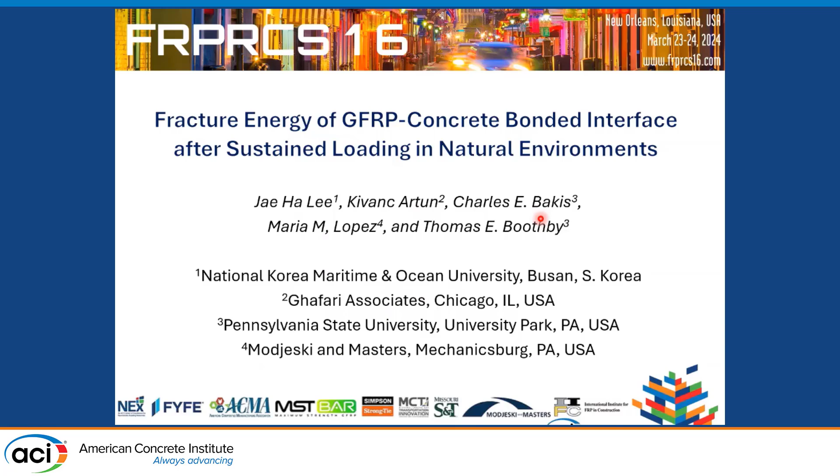So the topic is on some long-term conditioning of beam specimens. And I'm not going to give a detailed literature review on this. I'm sure a lot of you have seen this. If you're in this session, you're interested in this subject. But there's a lot of effects of different things on bond between externally bonded FRP reinforcement and concrete. Among them, you have freeze-thaw going on due to weathering outside. You have water outside. You have ultraviolet exposure outside. Temperature variations, and we've heard a lot about these things over the years.

But a long time ago, when we first designed this project, what we were thinking about at that time was, what about a natural outdoor environmental exposure? And what about in combination with sustained loading? At that time, anyway, there was practically no work done on applying a sustained load and then throwing on top of that the natural variations in climate conditions that go on outside.

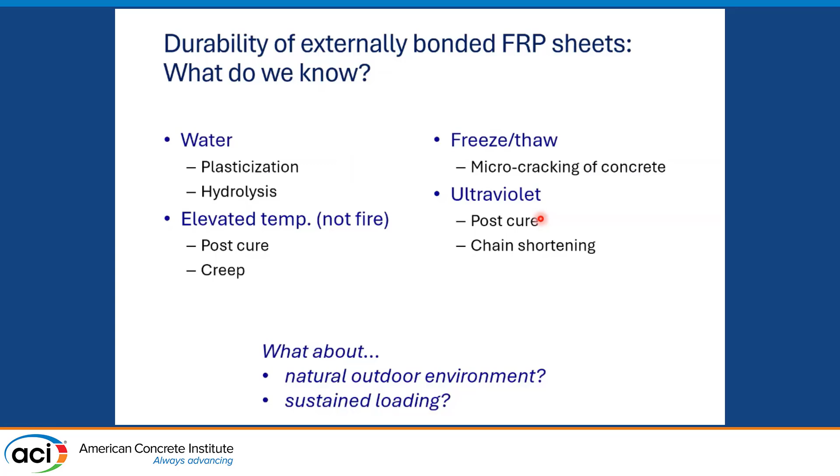So that's what we decided to do, and the objective here today is to talk about the results of some long-term testing where we have kept beams under load for a total of 13 years and finally took them off. And we have some intermediate data at 6 years. Of course, we got zero time data and did some bond tests following a sustained loading period. And that picture there shows just a picture of these beams.

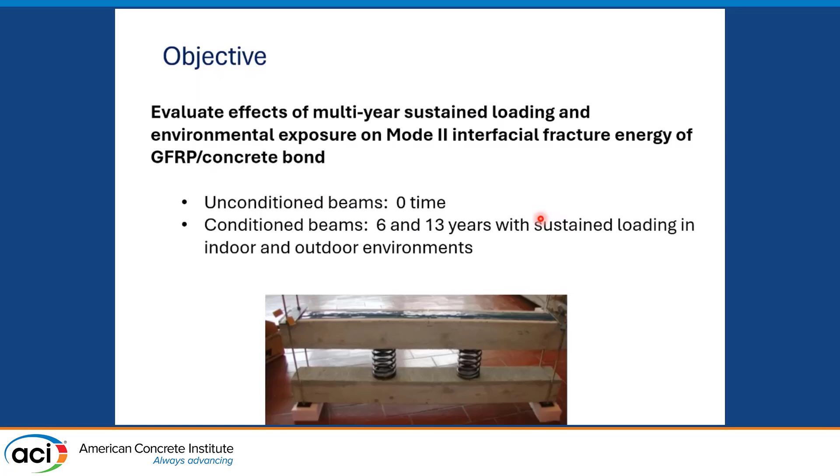I'll talk in more detail about how we designed this experimental program and then go over the results from the fracture behavior, basically getting the Mode II interfacial fracture energy from that kind of a specimen, a beam bending kind of a specimen. So first a little bit about selection of a specimen.

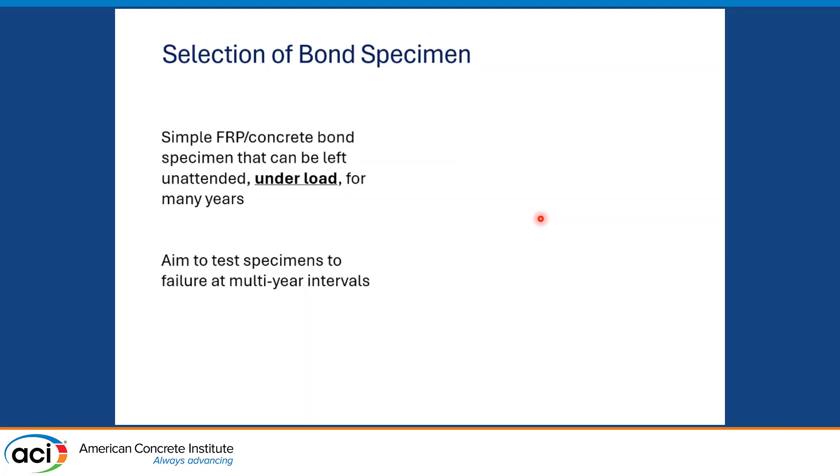And so what we ended up doing was going with, like the photograph on the previous page, a double beam setup, restrained at the ends, springs in the middle that provide a 4-point loading situation maintained over a bunch of years.

And the springs in this case were compressed considerably, about an inch or so, for those of you who think that way in inches. And so the variation in the load due to creep or something like that is fairly small because if you get a little bit of deflection out of 1 inch, that's actually a pretty small percentage. We looked at that as to how much the spring compression height changes. It's actually pretty small, within a few percent, I would say. And we were actually adjusting it within the first year to maintain a constant spring compression, but found out it really wasn't necessary after that.

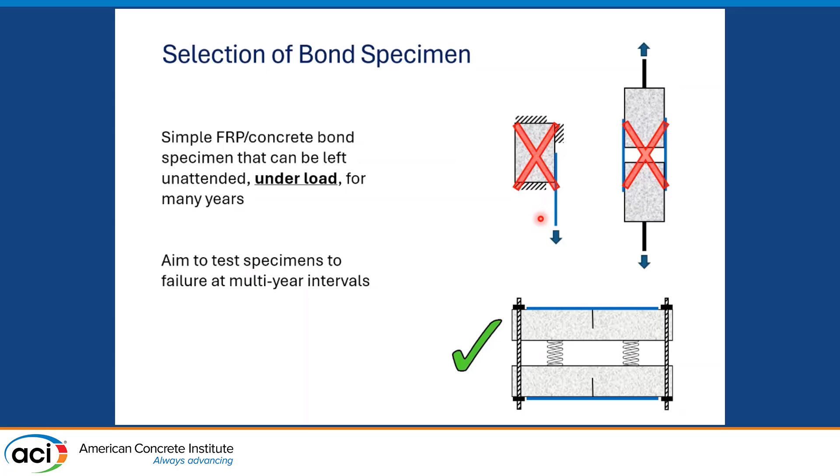This is a lot of stuff to look at, but first just some basic background. This is on GFRP. We did CFRP also. For this paper, I didn't include that, so we're just talking about GFRP because for one reason or another, we had a lot more data in the case of GFRP versus CFRP. The little information on the concrete there, we had two different mixes that provided roughly 21 and 41 MPa strengths. We had coarse and fine aggregates in the concrete. We did not put in any air entrainment admixture. I get that question often, and so that's something to keep in mind.

The epoxy itself is a 3-part system where you have a primer and then you have a putty to level out the roughness and saturant.

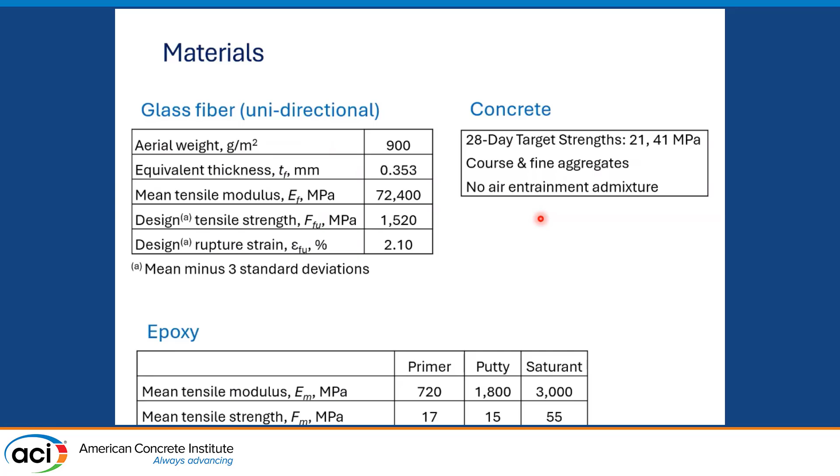Properties are there. You could look at them in the paper if you'd like. I'm not going to spend time on that. A little more detail on the design of the specimens. They're about 1 meter long, as you can see there, and 100 by 100 millimeter in cross-section. They are designed to fail by debonding.

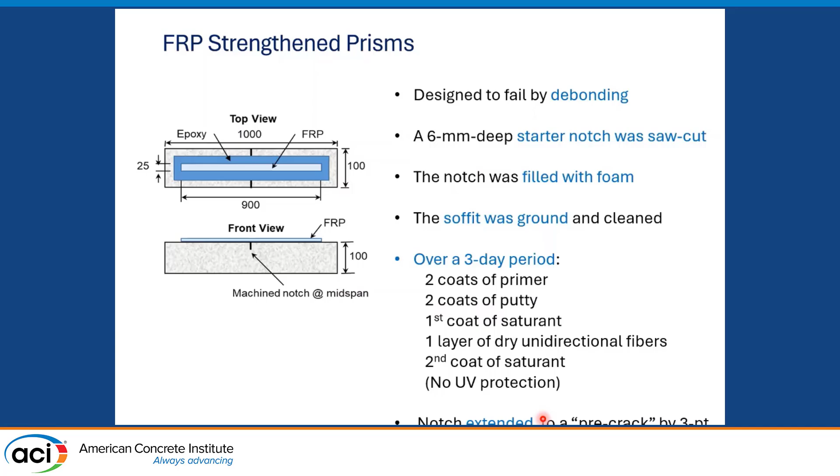We initially use a saw to cut a starter notch, as we call it, and then we fill that notch with foam. And after that, we grind off the top, clean it up, and then go ahead and apply the FRP system on top of that. After the FRP has cured, we put that beam into a load frame in 3-point loading, and we load it up until the concrete cracks and develops a crack which goes a good part of the way through the cross-section. Remember, there's no steel in this beam, so when you crack them, that crack goes probably 80–90% of the way through the cross-section, so they're pretty fragile in handling them after the pre-crack stage.

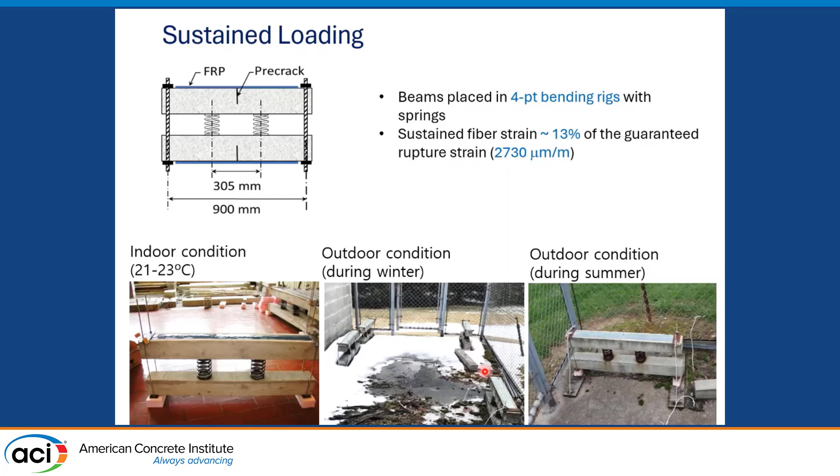So once they've been pre-cracked, then they're ready to go into the sustained loading rigs, as you can see here with the springs. We already talked about that. The sustained loading value was selected to provide about 13% of the guaranteed rupture strain in the FRP, which turns out to be about 2,700 microstrain. And so again, the idea is to maintain that over the course of years by use of those springs. And a couple of pictures on the bottom there showing the inside the lab, outside in the wintertime, and outside in the summertime. So what about that natural conditioning?

We're located in Pennsylvania. Those of you not familiar with Pennsylvania State University, we're in the middle of Pennsylvania, there where that red star is. It's called a warm, humid continental climate, although at this time of the year you wouldn't know it was warm. The temperature, as you can see, fluctuates between maybe +30 and -20 over the years. And if you count the freeze-thaw cycles, according to the climate agencies, they say 65. Not sure exactly how that's calculated. It might not be within the FRP itself, or within the concrete, but that's what the climate people say: 65 per year, which is 840 over 13 years.

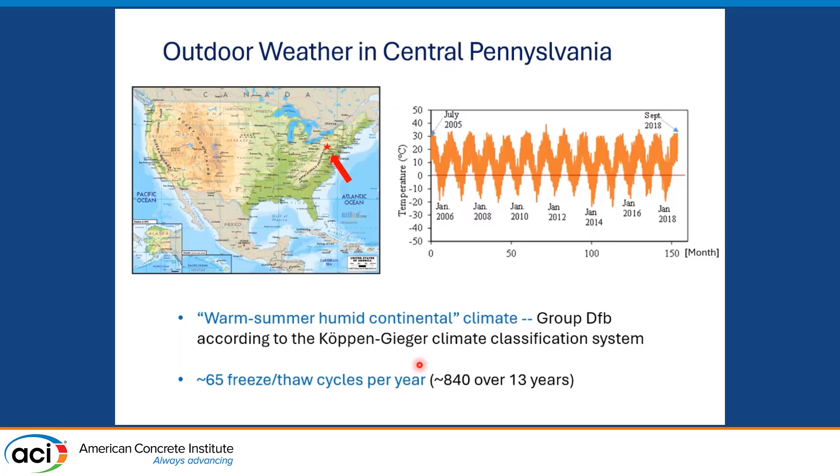All right, so after the conditioning, we get rid of the springs, we take the specimens back into the lab, and we do a 3-point loading test. So the idea is to debond the FRP from that starter crack, and then it grows outward in 2 directions from that. We do strain monitoring so that we could characterize strain distribution, and from that get the fracture behavior of the material. We used 2 methods early on. When we did the 0 time back in close to the year 2000, we did not have the availability of digital image correlation then, so we were using photoelastic strips.

I don't even know if anybody uses photoelasticity anymore, but it's an optical technique where you put a piece of reflective plastic on top of the FRP. You look at it with polarized light, and then you translate the colors into strains. It's a lot easier now with digital image correlation. As you can see here, all that stuff is done pretty much automatically by the computer. So that was done at year 6, digital image correlation, and also at year 13. We also put 3 strain gauges in the vicinity of the notch, right at the notch, and plus and minus 1 inch away from the notch.

After the test, as I said, the specimens were designed to debond, and we were able to rip off the FRP from the remaining part of the concrete and then core out some small cylinders and then do compression tests on those cylinders to measure the strength of the concrete, so that we could account for how much the strength increases over time.

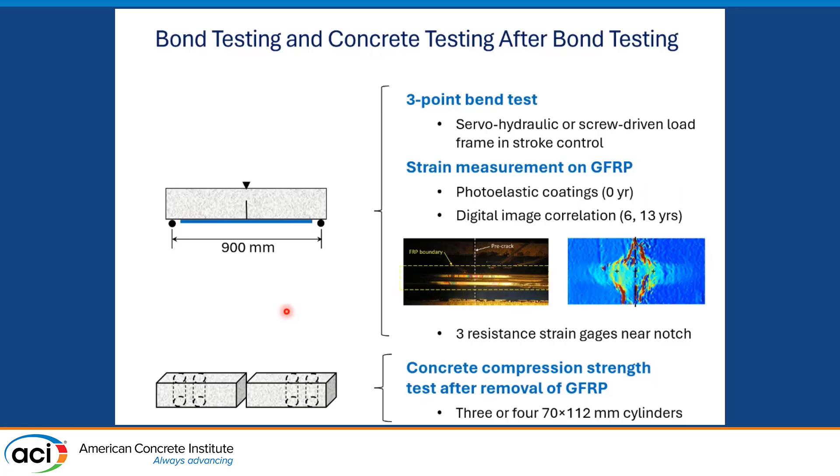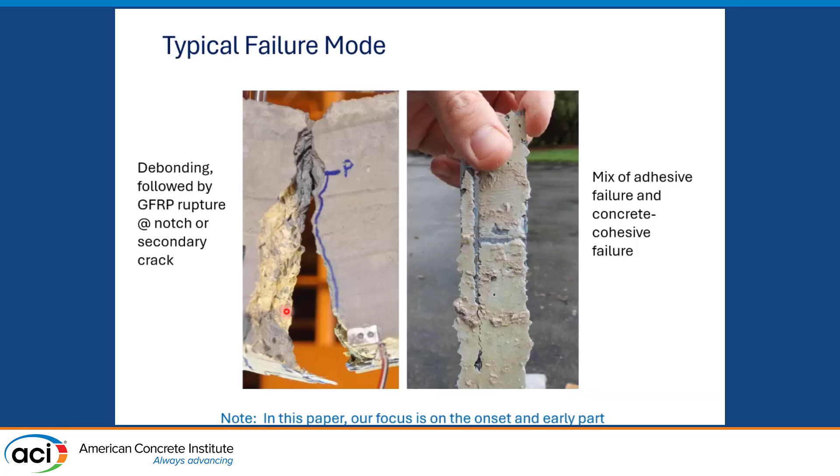Failure mode looks something like this. You typically get debonding for some distance, and there's secondary cracking going on, sort of like tooth cracking near that pre-notch. And then for one reason or another, very often the FRP would fracture at some point after delamination had grown a bit from the starter crack. In this paper, we're not going to be talking, I've presented this stuff elsewhere about the fracture strains, but we're going to focus here just on that initial part of the debond growth.

So the procedure goes something like this for analyzing the strains. We acquire the strain data by whatever technique we're using, photoelasticity. This example is for digital image correlation. These little orange dots are the strain gauge data near the notch. And as you'd expect, they match up pretty well.

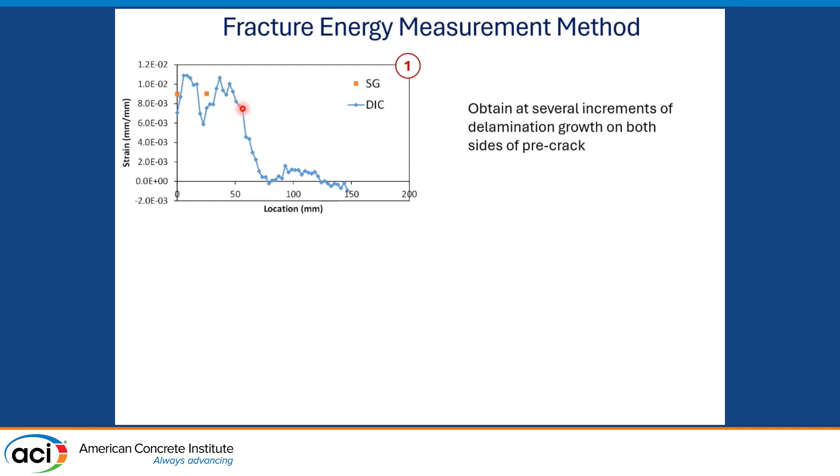And we let the crack grow. Usually it jumps in increments, and at each of those stages we record more data and are able to characterize the fracture energy as the crack grows away from the crack.

Next step is basically a backtrack, if you will, because we found a lot of trouble trying to fit our strain versus position law, which, by the way, we're using this paper down here in the bottom for the strain distribution and local bond distribution and those kind of things. We couldn't very easily use the top left figure because there's a lot of variation in the very local strains. So we basically integrated it to get slip versus position and then fit that form of the theoretical equation from that paper. Third step is to go back to strains again, and now you can see it fits fairly well, and so you don't have to deal so tediously with all of that noise in the data.

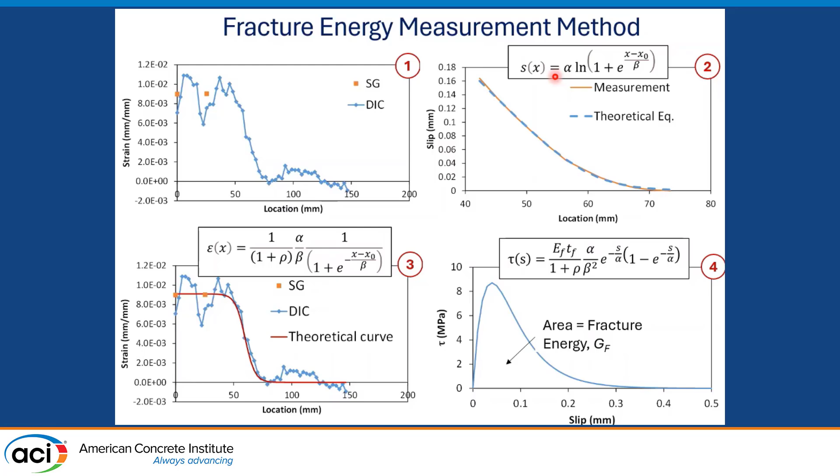And then finally, again, using the equations developed in that paper by Zhu et al., we can find the local bond stress versus slip behavior. All right, so getting into the results, the concrete cylinder testing, strength went up over time as you'd expect. This is outdoor for the stronger strength concrete.

You can see that at 6 years, it went up, and then at 13 years, it went up a total of 33% over those 13 years. The indoor didn't go up quite as much, 22%. The red lines down here are for the lower strength concrete, and that went up even more outside, 46%, and then indoors it went up by 8%.

We use this information to account for the increase in the strength of the concrete by using this equation by Lu and that gang over in Hong Kong, which has the strength of the concrete involved. We do a transformation of the cylinder strength over to the tensile strength, which goes into this equation, plug in our geometry of the FRP and the beam, and that actually can make a prediction of the fracture energy. Now, it won't agree exactly, as you'll see on the next page.

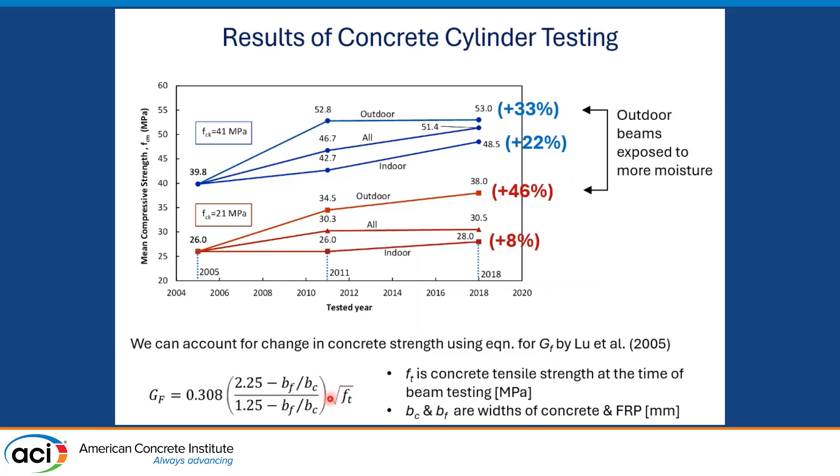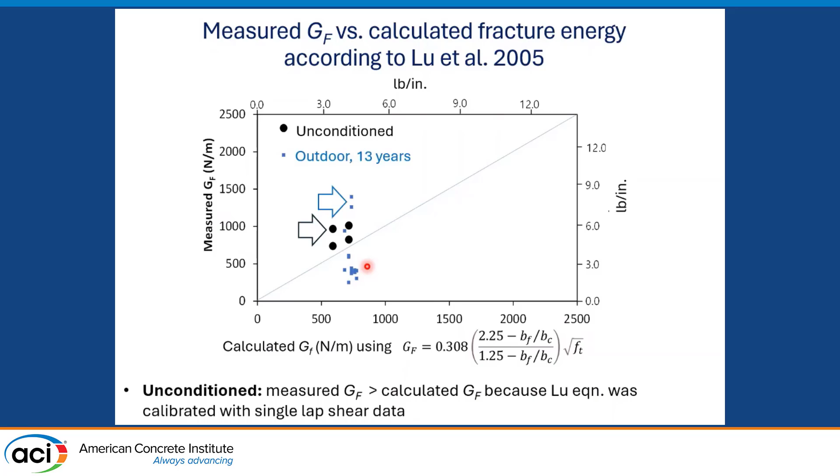The other thing about the 13 years is you see a lot of variation there and you see a lot of points. We actually didn't have that many beams. But what we did, as I said before, is we characterized the GF, the fracture energy, as the crack grew away from the pre-notch. So there's actually a lot of different measurements from some single specimens that are embedded in there. So a lot of things cause up and down depending where you're measuring GF as the crack grows away from the starter notch.

This is just 4 more sets of data. I know this is a lot to look at, but it's basically the same thing I just showed you, but for all these different conditions of indoor and outdoor, 6 years and 13 years. And it's basically the same conclusion, which is that the data after years of conditioning is up and down depending where we measure the fracture energy, and of course depending on the environment as well. We're interested in the environment. Okay, that's what we want to do.

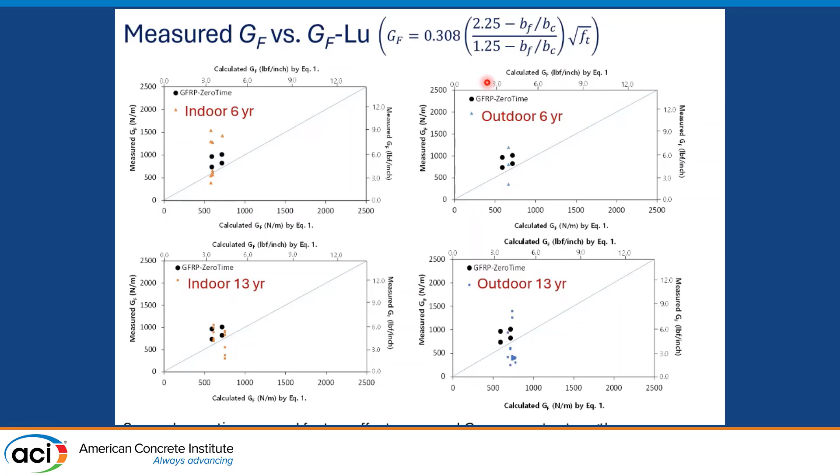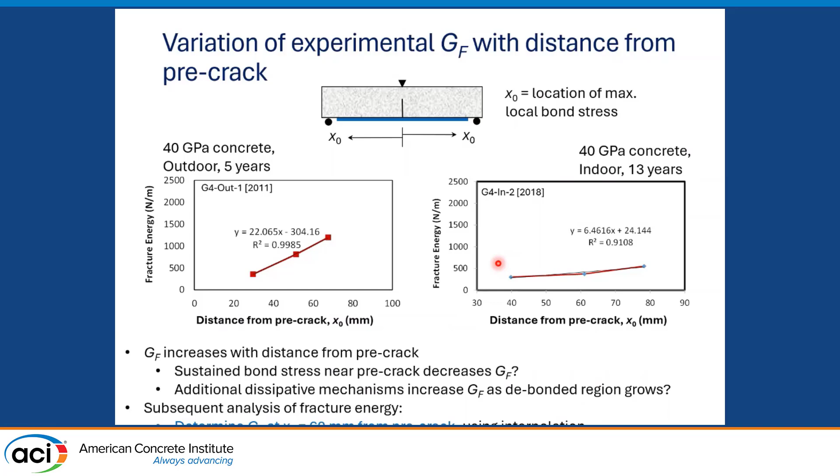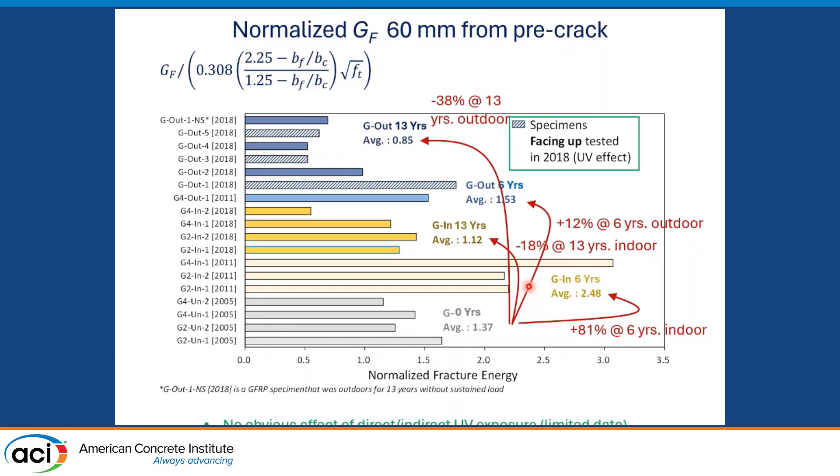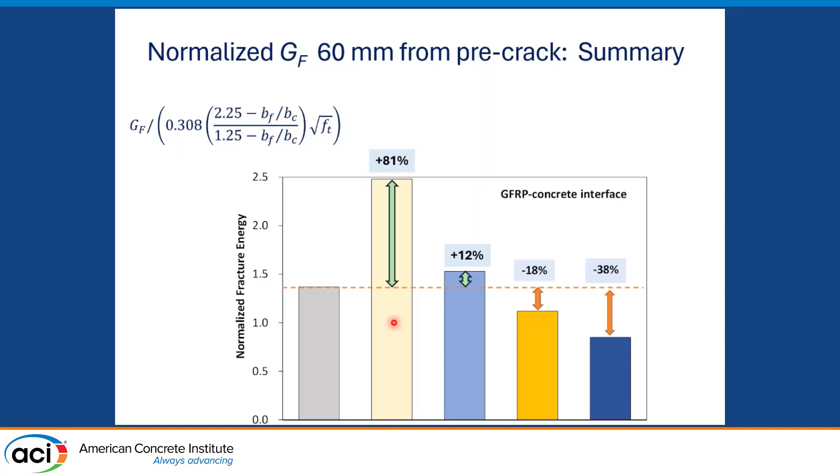Second, if you look at the 0 time versus 6 years indoors, you see plus 81% on average in the fracture energy. If you go out to 13 years, you see minus 18% from 0 time. So it went up 81, and then it ended up down at minus 18 after 13 years, and that's indoors. If you go to the outdoor set, you see plus 12% at 6 years, and then minus 38% at 13 years. So fracture energy went up first, and then it went down. So that can be summarized here on this page. This is the same information where we just collected the averages, and it basically repeats what I just said, that at 6 years, everything is better in terms of the fracture energy, and at 13 years, everything is worse in terms of the fracture energy.

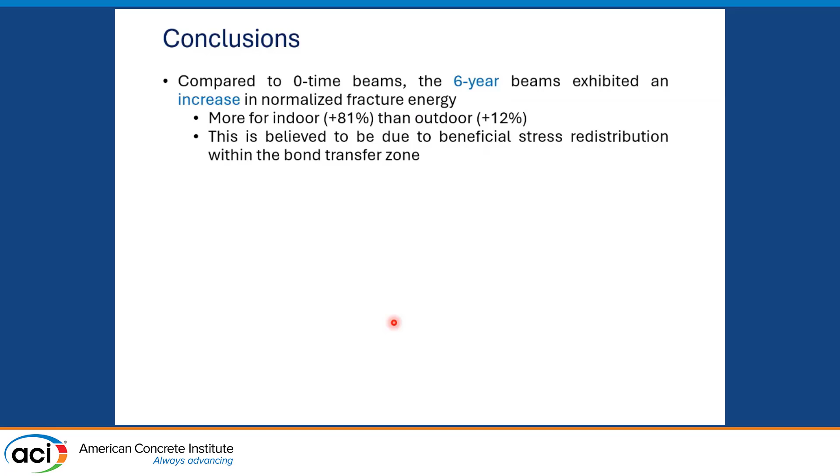So, in conclusion, what came out of this, waiting 13 years and a few more years to write the papers, are the following pieces of information. Compared to the 0 time beams, 6-year beams exhibited an increase in the normalized fracture energy. After we accounted for the variation in the concrete strength, the part that's left, which would be due to the sustained loading and due to the environment, is as shown there, plus 81% indoors, plus 12% outdoors. And we think, and Maria presented a talk yesterday which talked about the stress redistribution in the vicinity of the notch when you have sustained stresses going on, and several other people have seen this too in the intervening years, that the stress concentration relaxes, and we've seen it with the stress distributions too, which is what could be behind that improvement of fracture energy initially. Later on, though, it's a different story.

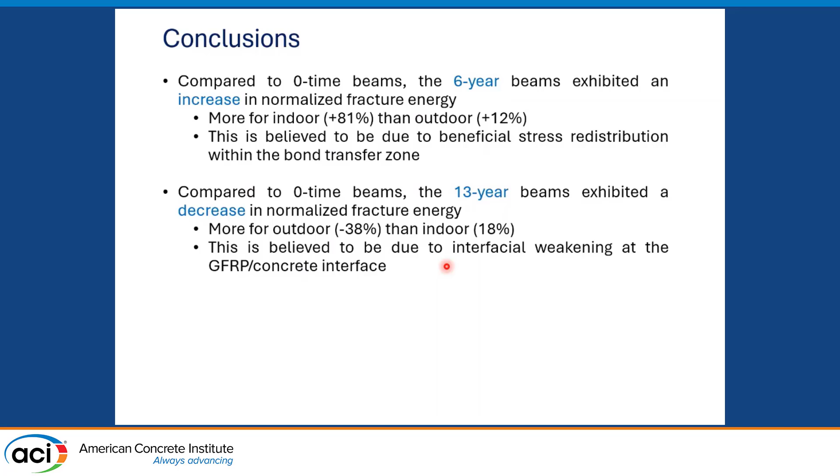As we said, outdoors minus 38%, and indoors, that's a minus 18%. Sorry, another typo there. Believed to be due to the environmental effect and perhaps the effect of that sustained loading as well outside. As I said, ultraviolet, we didn't have a tremendous amount of data there, but we didn't see any strong evidence that either direct exposure to the sunlight or indirect made any difference. And I failed to mention earlier that we didn't put any UV protection on this system. We just put it out there just the way it was. So maybe not the best procedure, but back at that time, I guess we didn't know what we were doing, so that's what we did. But nonetheless, we didn't see any tremendous UV effect.

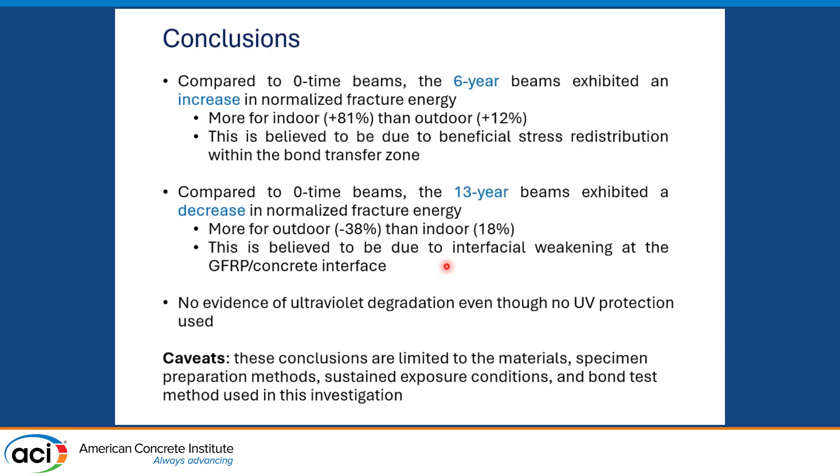And I guess I should always put a bunch of caveats on this. Of course, a lot of these things depend on the details of the particular materials we used, how we prepared the specimens for what we knew back then in the early 2000s, the particular exposure conditions we had, and of course the bond test method that we used, the beam bending test method. So these things all kind of tied into the conclusions, I would say. If anybody's interested to see more details on this, we have published 2 papers. This is just a small snapshot of this. As I said, we have CFRP data as well. It's given in 2 journal papers.